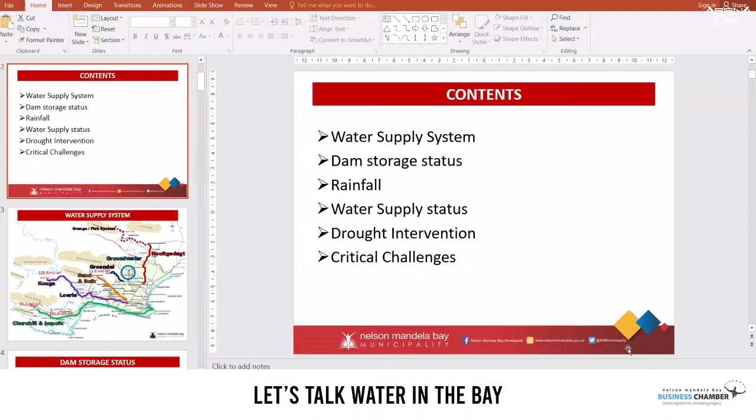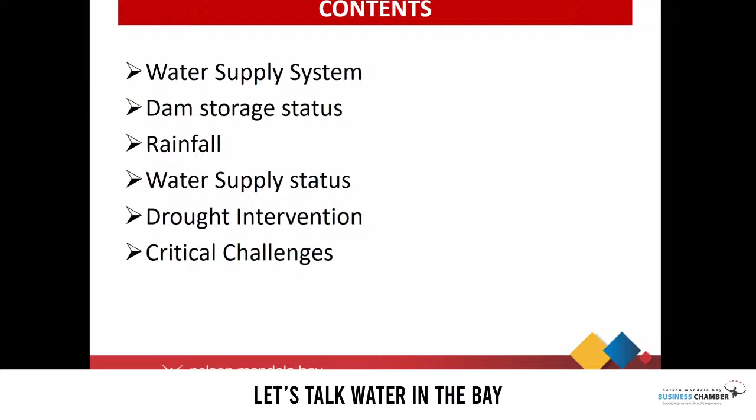I'm Barry Martin, responsible for water and sanitation in the Metro. And this is a status quo of where we're finding ourselves as a Metro in the water. Those are the six topics that I'll discuss briefly. Just to give an indication of where our water comes from, the routes it's coming from.

From the municipality's point of view, there are two main supplies of water: Churchill and Impofu, and the Nooitgedagt. And then we get water and allocation from the Kouga-Loerie system. The Sand and Bulk River is an old 100-year system that's running, and there's a dedicated supply from the Groendal Dam to Uitenhage and some groundwater from springs. And those are the volumes of the dams at those locations that I refer to. I didn't indicate the dams of the Bulk and Sand because they are quite small in comparison.

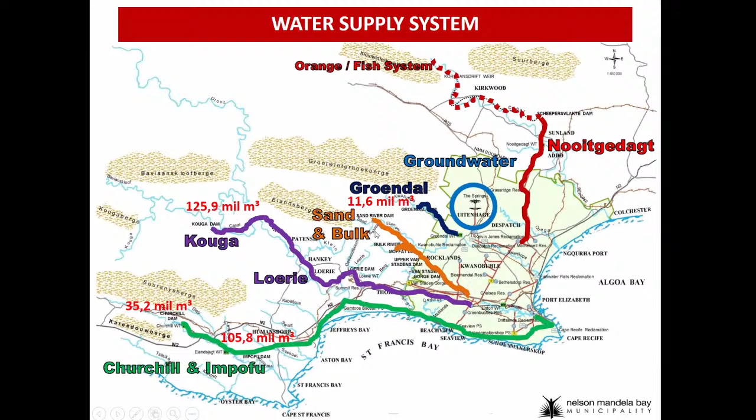Just to bring you up to speed on what the water situation is currently. Last week Wednesday it was about 18.4%. The average dam levels yesterday were 21.62%. And you can see that the Kouga has climbed above the 8% mark where it was. The Churchill was at 52% and it's climbed up by virtually 10%. Impofu was sitting at 18% and Groendal was sitting at about 25%. So there's been some inflow from the two weekends of rain that we actually had. What is the significance of that?

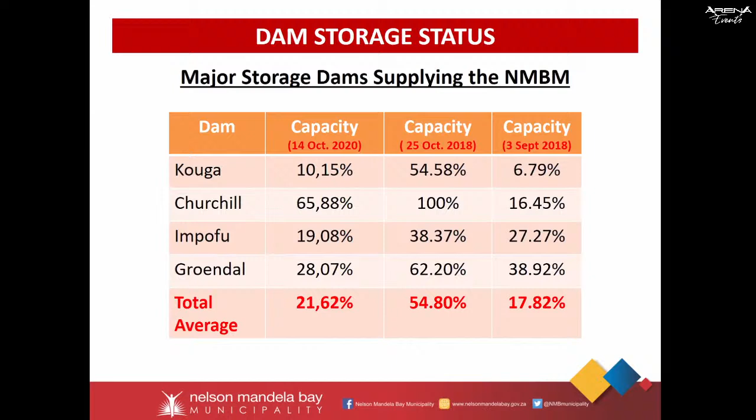Last year, in October 2018, when we had those good rains, the dams went up to 54%. And I just want to show you that two years ago, it was rain of above 200 millimeters in one rainfall event that caused the dams to climb so rapidly. There was a small rainfall event in November last year. This is the 20-year average at the Churchill Dam, and this is just an enlargement of that same period. The hollow bars are the 20-year average rainfall, and the solid ones are the actual rainfall that has happened.

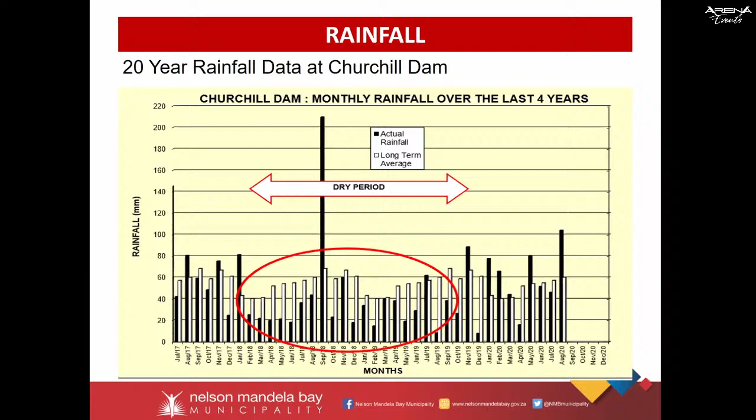So if you look at the period from July 2017 to August 2020, there have been 3, 6, 7, 8 times that it's been above the 20-year average rainfall. The most significant ones above the 20-year average were September 2018, one last year, and one that happened now recently. And we have to add the most recent one up here. So it just shows you that we have had below average rainfall over the last couple of years, and that is one of the big factors why our dams are so low.

Looking at the weather forecast here, this is what we get from the South African Weather Services to indicate the average weather prediction going forward. And you'll notice here, where there's no coloring, that is where our dams are located. And what does that say? There's no clear signal of the kind of rainfall that we can expect here. So we can have no rainfall or a lot of rainfall.

For the last two weekends, we've been lucky to have some rainfall, but there's no significant rainfall predicted in the next couple of weeks. So we are rather erring on the cautious side to say we will at best have average rainfall for this period. And the rainfall statistics that I've just shown you indicate we will probably at best have that situation going forward.

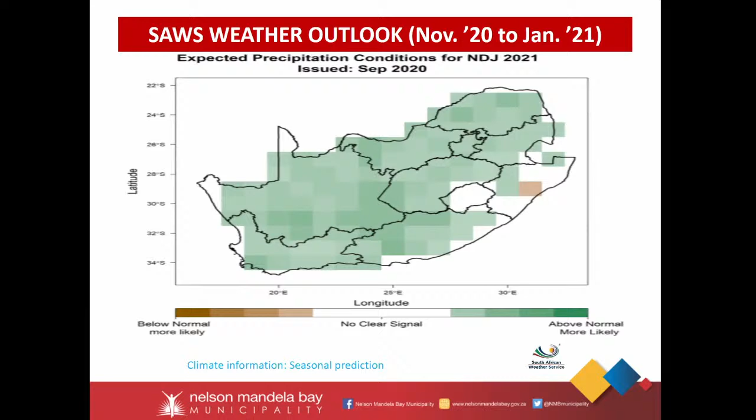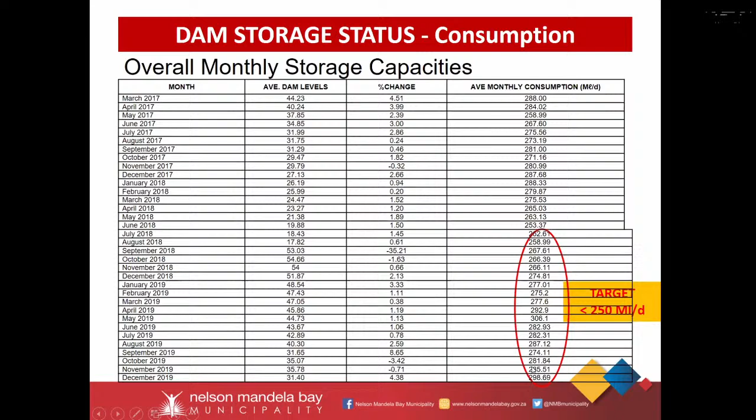Then just looking at our average water consumption since 2017, which we've been tracking, you can see that towards the end of 2019 we were hitting close to 300, and the situation has really not significantly changed. At the moment, we're sitting at about 290 megaliters per day. In the month of September, we averaged roughly 288. We're sitting at 287. And what this means is that we are over-abstracting on the available water, which is 267. That's the restricted volume of water that we have as a metro available from our resources.

Just to put that into context, at the beginning of the water year, which is 1st of July, in June of every year the Department of Water and Sanitation takes stock of the available water in all the resources and checks how much water we can take safely out of that resource for a 12-month period, which is a water year. And based on that, restrictions are imposed. On the Kouga-Loerie system, there's a 70% restriction on the water. That means we're only getting 30% of our water from that resource. On the Impofu-Churchill system, we are restricted to 50% of our water.

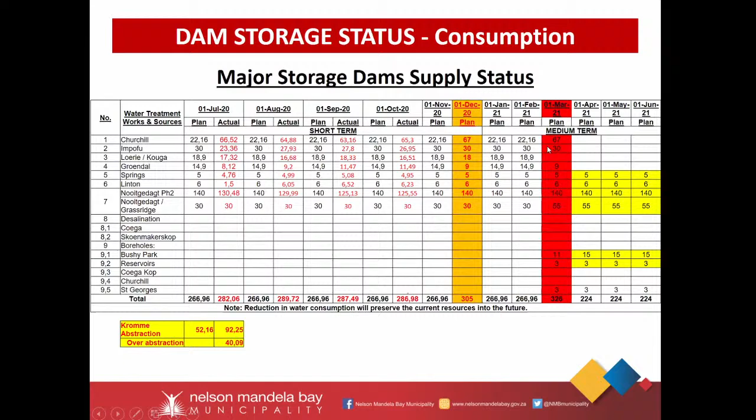So what we're thinking of taking out, 50 megs per day for the 12 months, we can't take that. We're taking more than that 50 megs out of one resource alone. In fact, we're taking about 80, almost 90 megs out of that resource, meaning the available water for a 12-month period is almost cut down by half. And that is the dilemma that we sit with as a metropolitan municipality and its customers.

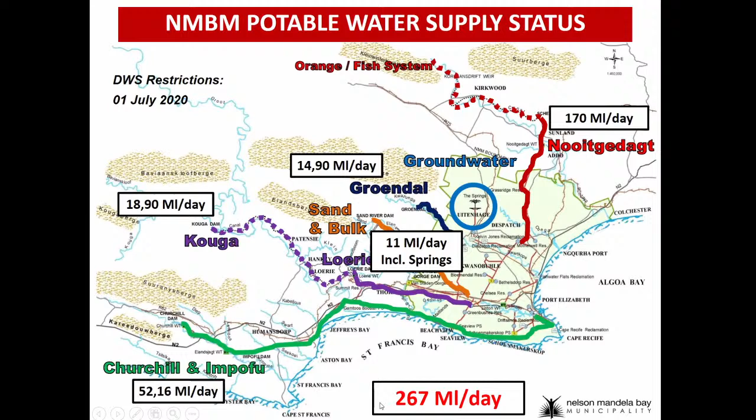So this is just a depiction of the 267 megs per day that I've indicated, 52 from the Churchill and Impofu, 18 megs from the Loerie Dam, which is the balancing dam. We take our water. Remember, that's only 30%. That equates to 30% of available water. Groendal Dam, we only can take about 15 megs per day. Between Springs and the Sand and Bulk, we take an amount of 11 megs per day, and 170 megs we're bringing in from Nooitgedagt to make up the 267. So this is part of the status quo that we're looking at.

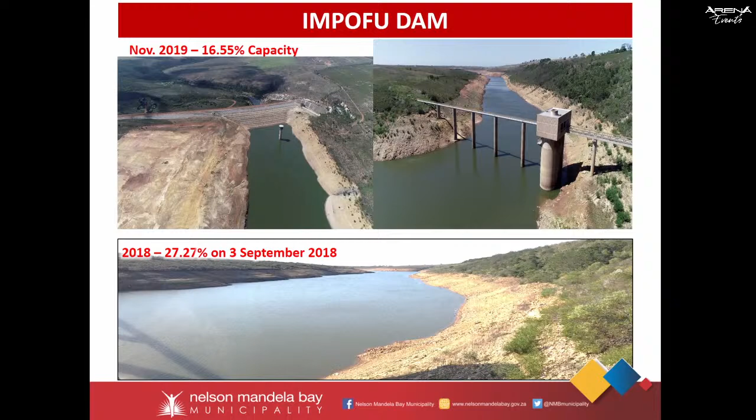These pictures this morning look similar to those in the newspaper, and it just shows you we're going back to September 2018, so we're actually back to that situation again, 24 months later. And looking at the individual water supply, we had these graphs updated yesterday, and it just shows you the impact down here. The graph has been flattened since June. We've been speaking about flattening of the curve. So this is what happened in June. What this means is we're just about taking the average rainfall that is coming in, and this is what's used out of the Kouga Dam.

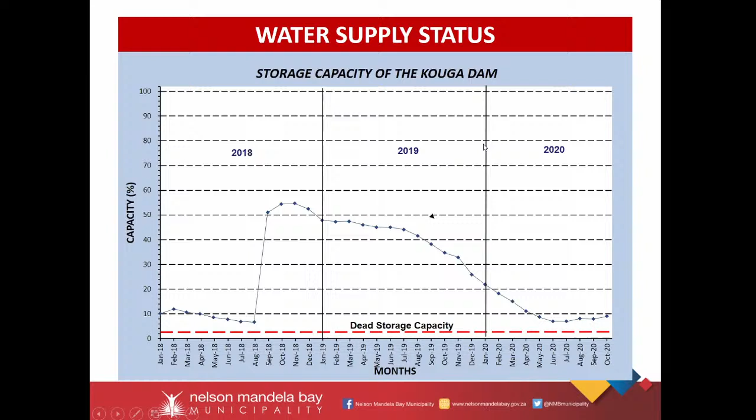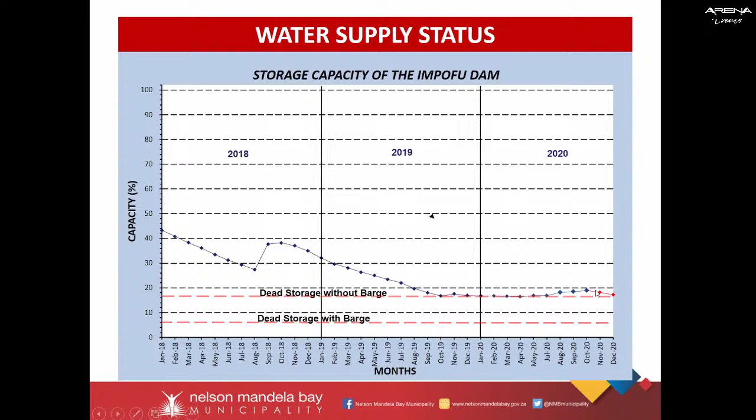The Impofu Dam, even with the rains that we had in August 2 years ago, the dam just climbed from 28% to about 38%, and since then it has been dropping all the time, and it's been flattened at the level where the barge is operating at the moment. And going forward, we anticipate a decline in the dam levels, because we're going beyond the spring rain period into the hot months of summer, December, January, February, where we have our hottest months and obviously months of highest water consumption as well. So we are going to look into a very difficult period going forward, even though we did have some rain and inflow into our dams.

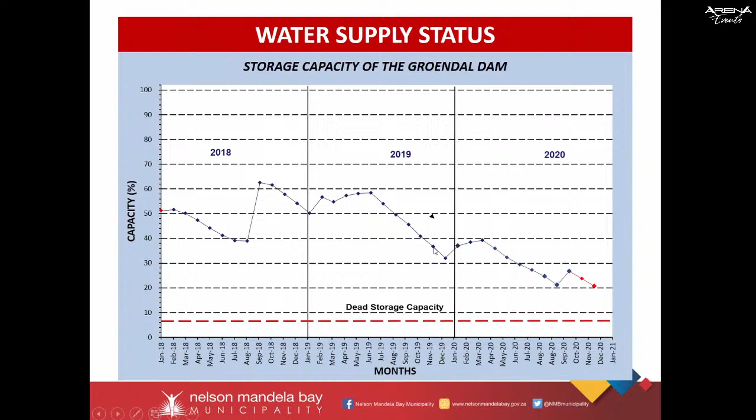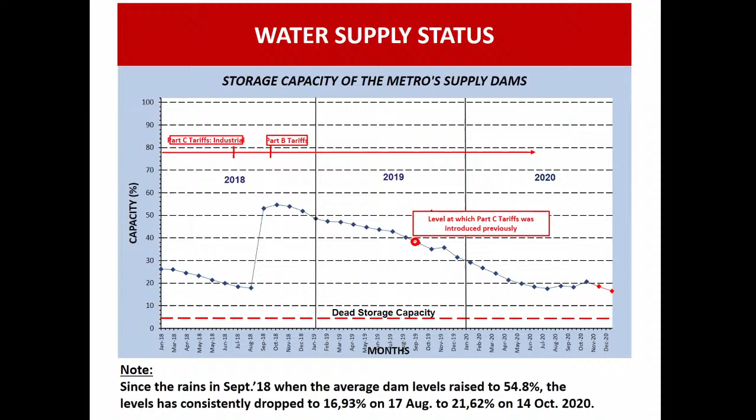That was dated yesterday. So that just depicts the fluctuation in the, shall I say, low rainfall that we've had and the water consumption associated with that during the same period. So what is the municipality doing about it? We have embarked on looking at the backlog of our water leaks, taken stock of it, because that is our first port of call. So we have looked at that already, and we're looking at the water consumption trends that we have had. So we believe by doing this, we've intervened and dropped our water consumption about 5 megs per day. And these are the options that I'm just going to discuss briefly going forward.

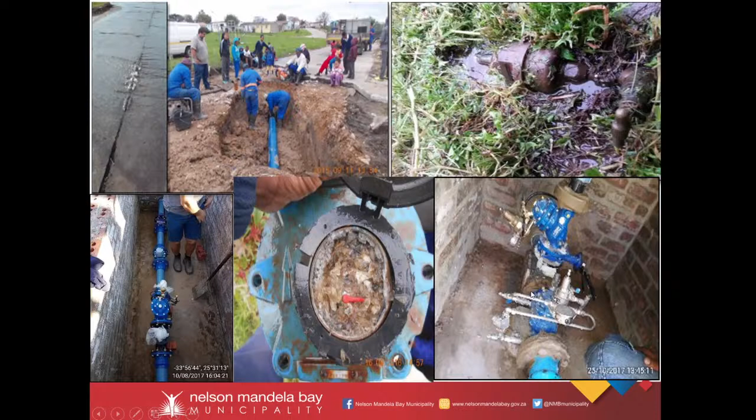As I've indicated on the water leaks, the guys are looking at water leaks. We even look at pressure management per se and advanced pressure management. We've got 60-70% installations of this in the Metro as well, and this is what we are doing on an ongoing basis. We've identified an additional 10 stations that we will be rolling out over the next 2-3 months as well to deal with this matter.

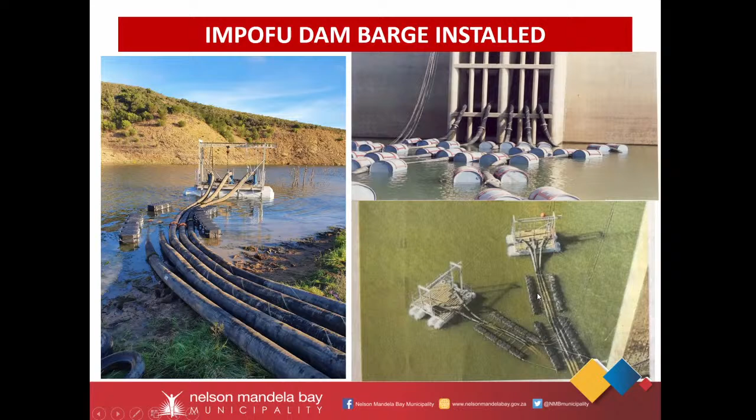Then we spoke about installation of the barge. The barge has been installed on the Impofu Dam. We deliberately did not abstract water from the barge until it became necessary, because it would be more prudent to save the water in the dam and rather use more water from the Nooitgedagt scheme. So that is what we've done there. But over the last couple of months, we've been running the barge full bore, and we're extracting about 30 megs per day from that resource at the moment.

So by doing that, we're actually reducing the demand on the Groendal Dam, because the Groendal Dam does not have an alternative water source backup. So we're cutting the zone smaller to take less water from the Groendal Dam, and therefore also increasing the usage of the water from Nooitgedagt.

The remaining water that's not being used in this area, we pump through 2 booster pump stations, one at Motherwell and the other one at Stanford Road, through to the Greenbushes area into the Chelsea Reservoir area, and from there we distribute it into the western areas, and it feeds into Gelvandale, and from there down into the Lorraine, Fairview areas as well, bringing the remainder of that water to supplement the reduced water we get from Loerie, because we can only get 18 megs per day from there. So the remainder of the water we must take from there.

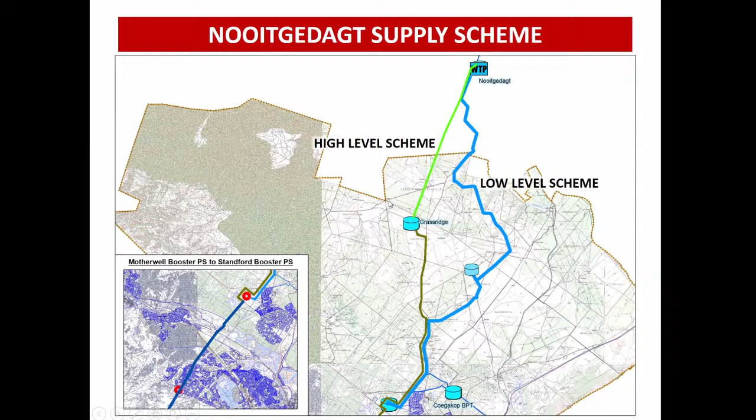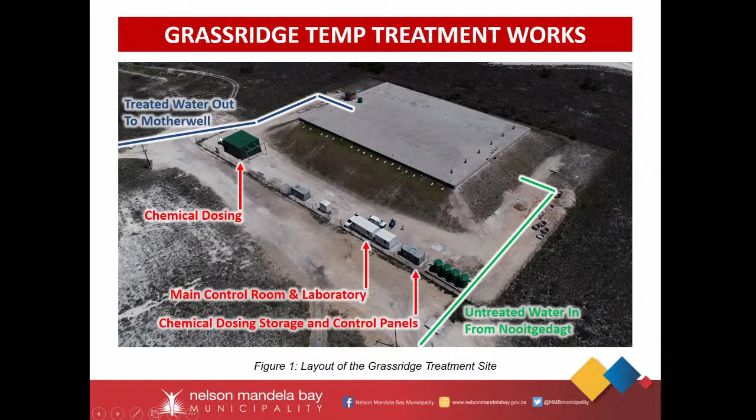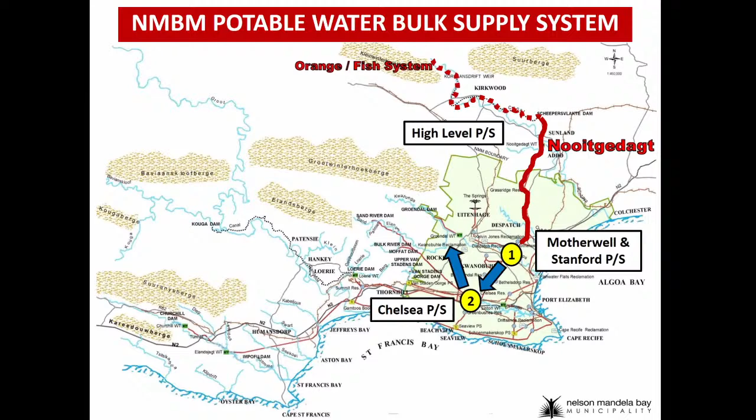And so that just shows how we bring the water in from the high level pump station into Grassridge. After treatment, it goes into Motherwell Reservoir and the Motherwell Booster pump stations, and from there it goes further to the Stanford Road Booster through to Chelsea, as I've explained earlier on.

And then from the boreholes initiative that we have, we've got the Coega Kop boreholes that we've drilled. We've located them on the fault that is linked to the springs, what we call the Coega fault. And we've drilled quite a number of boreholes there. We found 5 production boreholes that can yield significant water. The amount of water that we found is between 15 and 20 megs per day.

And we're constructing the water treatment works at the moment, because the water is high in iron and manganese. It will make your clothes red-brown when you wash your clothes in that. And that's the reason for the treatment facility there.

At the Churchill Dam, we've also located some boreholes there, and the boreholes have been drilled already. We need to put the pumps and motors onto them now, and the pipelines to link them to the treatment facility at Churchill. The same with the Moregrove.

Oh, there he is. Do I continue? Okay. Then at Bushy Park, apart from... are we online? I've explained.

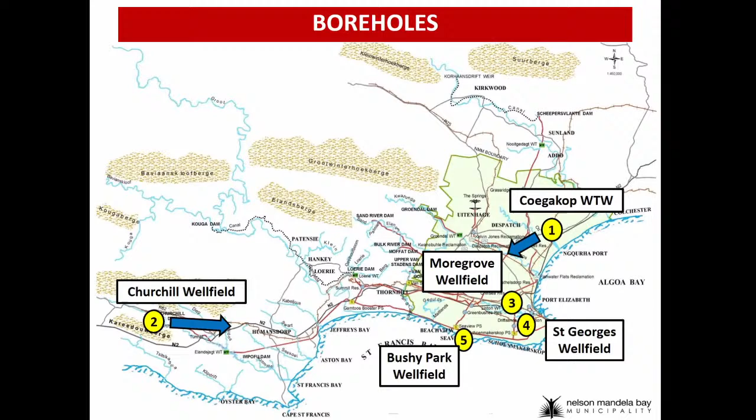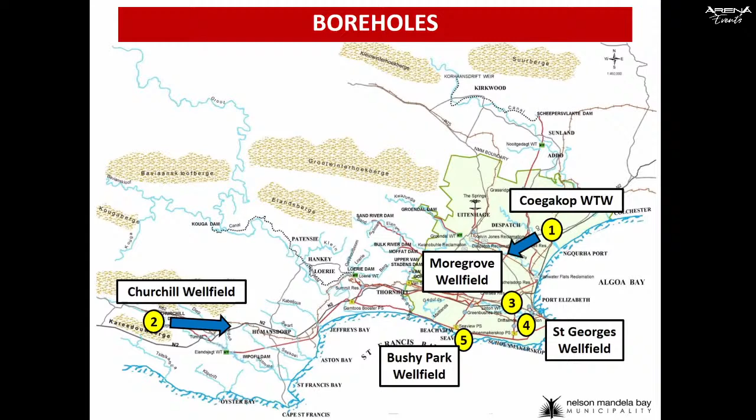So we're getting down to the Bushy Park Wellfield. In this area, we have discovered a good resource of groundwater, which we want to develop. Of all of these, the most productive one is Bushy Park, and that is our main target area, supported by St. George's, and then Churchill and Moregrove. All of these together, we hope to get about 15 to 20 megs per day. And if everything comes on stream later this year, say early next year, we hope that'll be 5% of our demand that we'll be able to augment and offset from this resource.

Communication is obviously very relevant. You've seen on our social media platforms as well as the local newspapers the awareness campaign we're going through, and we appeal to our customers to save water at all costs, to stick to 50 liters per person per day.

And as the CEO of the chamber has indicated, 10 years ago the critical water nature was highlighted, and we are fully aware of this, and behavioral change has to come with this as well. We always say South Africa is a water scarce country, but sometimes our actions don't reflect that, and that probably includes us as a municipality as well, because we need to add more urgency to our response to leaks and the like. So that has remained a critical area for us.

So going forward into the medium term, which is probably 6 to 12 months, I indicate 3 to 12 months because the work is happening already. In about June next year, we will be on full capacity for the Nooitgedagt low-level scheme at 210 megs per day. So that will bring additional water available to us as well.

Then following that, in about March this year, they commence construction of the Coega water treatment works, and that's a 26-month construction period, and that'll come on stream in about 2 years from now and generate 15 megs per day.

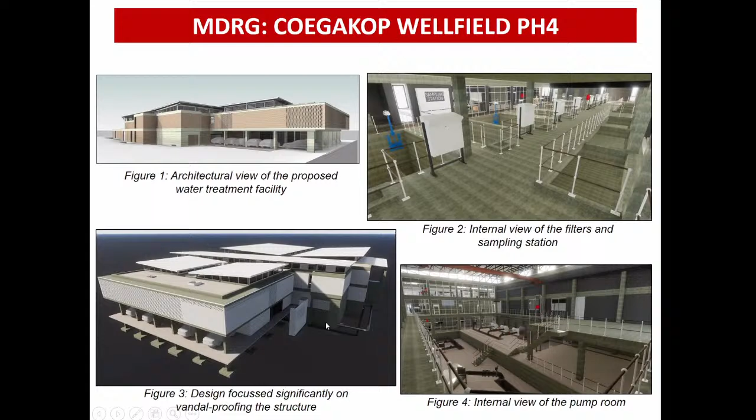This is the latest technology in viewing and providing schematics of how the facility will look, with a lot of natural light, process control, seeing what is going on. So it's been very designed around people operating it and on the smallest footprint possible.

Then just to summarize in terms of medium to long term, because as much as we're looking at the short term to deal with things, we must also look at the long term. And as indicated earlier on, we must look at this as well so that we can look at our water sustainability into the future. So the boreholes will bring us 15 megs per day by February, March next year. The Nooit Gedacht phase will bring us an additional 40 megs per day by June, July next year.

And then the Coega desal plant will probably be by December 2021 or early 2022. That will be up and running then. And then the Coegakop water treatment facility will give us 15 megs per day by September 22. By September 22, we would have augmented the water system with 85 megs per day. And this excludes an additional desal plant for the metro on the Schoenmakerskop side of the metro. So these are our medium to long-term plans, coupled to what we're doing in the interim, which will put the metro in good standing. But the key is to cut the water consumption down currently to achieve that.

So our critical challenges: obviously, we've had a prolonged rainfall period of fluctuation, and we had a 3-year low rainfall period from roughly 2008-9 right up to July 2011, when we had a recovery of the dams. And then since about 2015, 2016, we had a bit of fluctuation, and that's the prolonged period of low rainfall that we've had. The Kouga and Impofu dams, the biggest dams, haven't been full for the last 3 years. So that just indicates the prolonged period of low rainfall that we've had. We still have a problem with high water consumption, and obviously we need to cut water consumption at all costs, at all levels.

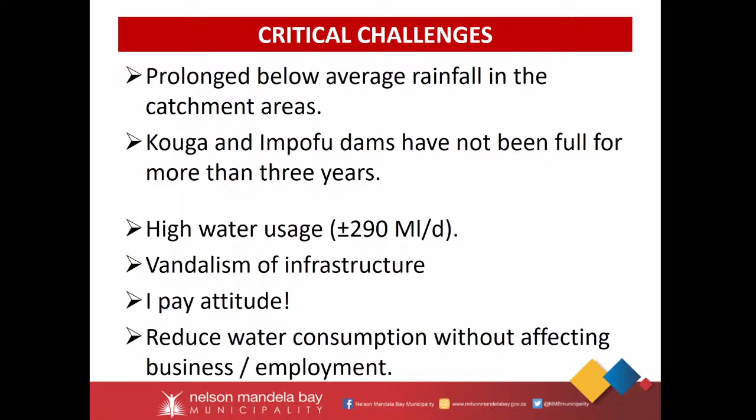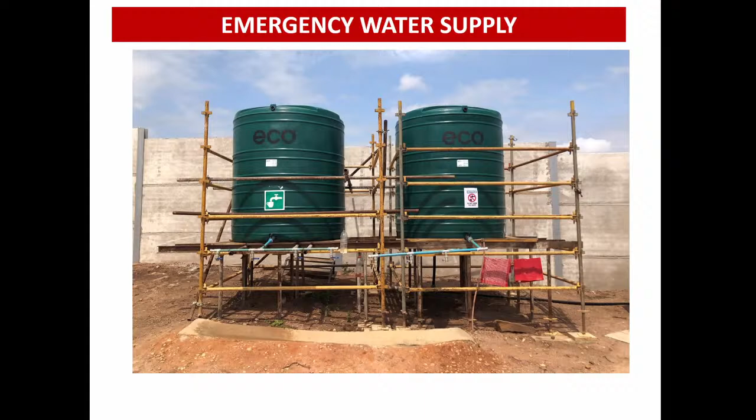We have to reduce the water consumption without affecting business, and this is what we've been liaising with the Business Chamber on over the last couple of years. Because of the frequency of drought situations in the metropolitan space, we've had a lot of discussion with the Business Chamber over the years, and businesses have become water-wise, and therefore we wouldn't want to affect their business, because that affects employment and the like. So that remains a challenge to us. How do we encourage businesses to use as little water as possible, but also keep their businesses running and keep employment at appropriate levels, if not higher? And especially from a domestic water point of view, if we don't do the right thing, this is where we could land up queuing for water going forward.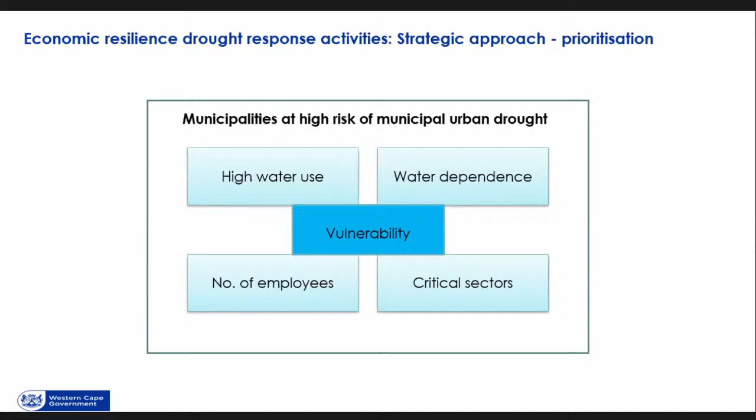This was critical for us because we have certain smaller municipalities where one employer might employ 2/3 of the people who have employment in that area. And we also looked at critical sectors. So if there was a day zero, which were the businesses or types of businesses that couldn't afford to stop operating or to radically downscale their operating.

Across the 4 areas that I spoke about, just some key things that we did learn is that in terms of water consumption, there were significant reductions that were found across multiple sectors. So sometimes these reductions were forced by very heavy restrictions placed onto business. We found the one challenge was sometimes it was seen as the easier lever to pull to reduce water use in businesses by huge amounts because it was easier for government to control. But that has a massive economic impact.

But what we did find with businesses was they did on their own bat manage to find significant water savings. A lot of those savings they could actually achieve with minimal costs. And so a lot of that was through improved metering, sub-metering, behavior change, and process changes. Significant savings. What we also found out from businesses was the more they managed to reduce water costs, they actually subsequently landed up saving energy costs as well, because they were essentially improving their process operations.

Those interventions that businesses put in place around costly technologies actually landed up having very short payback times, particularly as the cost of water rose. There were extensive water cascading opportunities, so within and between businesses. So that's using the partially treated water or partly used water with another business that doesn't need potable water for certain processes. And there was also increased water treatment for reuse on site that a lot of businesses put into place.

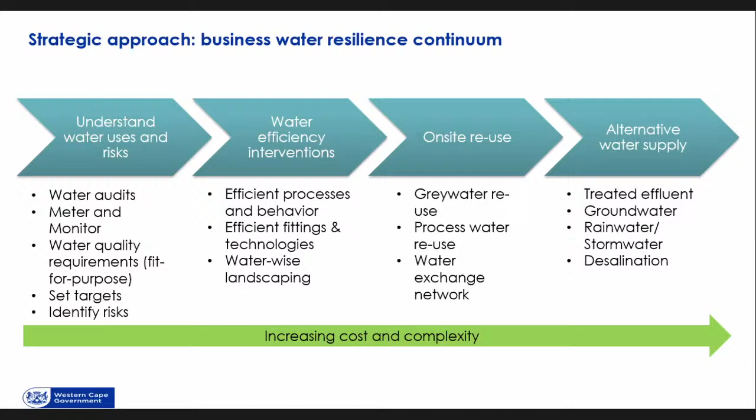The third part of the continuum was looking at potential on-site reuse, grey water reuse, as well as process water reuse, and also looking at water exchange networks with other businesses, particularly in an industrial area. And then on the right-hand side is the alternative water supplies. So whether that be treated effluent, groundwater supplies, rainwater tanks with treatment, desalination, etc. And obviously, as you move from the left to the right of the continuum, you increase the cost and complexity of what's being put in place.

Green Cape, who are a partner through this, also pulled together a number of case studies. Those are also available, and they clearly show what a business put in place, what they spent in that initiative, and how much they're saving both water-wise and cost-wise. We had a number of communication tools, and as I said, those websites are still live at the moment. And we also provided a number of posters. Those posters obviously need to be applicable depending on the audience. So some of the posters that were developed were very much for the tourism market.

The province got hard hit by tourists not coming, fearful of not having water, but also fearful of creating a further burden on the area. So a lot of posters and communication material went out to say, please do come visit. You're the lifeblood of our economy. We need you, but use water responsibly when you get here. There was also a lot of communication material put out, helping to show people, individuals, how to use 50 liters of water a day.

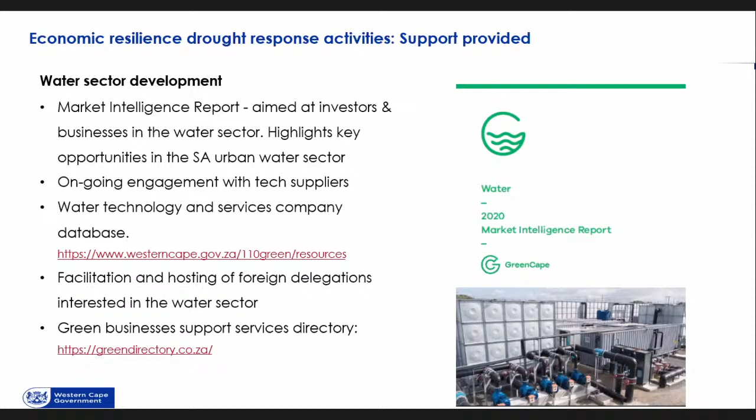And then importantly, Green Cape, with the funding of the Friedrich Naumann Foundation, have just released a Green Business Support Services Directory. So this is for any businesses in the sector that need to know what support is available and where. So further in terms of case studies, just touching on a few things, is JG Afrika, for example. So this is an office commercial environment. They managed to reduce their water consumption by 67% purely through awareness and water efficiency measures. This is a company that was fairly up to speed with issues around resource efficiency even before the crisis. So it shows what is possible when you really apply minds.

ACA Threads, so a big manufacturing company, they reduced their water consumption by 70% over 5 years. So they started pre the drought, because we obviously had a drought back in 2010 as well. And that was through equipment automation and process adaptation. They're saving 1.9 million rand annually. Quality Beverage reduced their water use by 27%.

That was largely through a staff water saving campaign and reusing bottle rinsing water. So again, it shows the cumulative savings so far, but also the investment that they put in place, and shows that a relatively small investment can lead to massive savings even from year one.

Transpaco Flexibles, so another manufacturing company, reduced water by 85% through conversion from water to air cooling machinery and recycling process water. And lastly, GSK, the pharmaceutical company, by using 2 reverse osmosis plants, reduced their water consumption by 42% over 6 years.

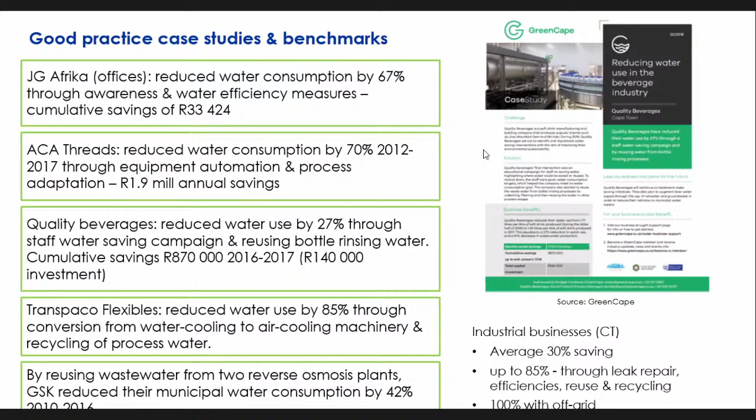So a huge request to yourselves is, when you engage with businesses, is to really stress that in the city of Cape Town, for example, commercial water use is higher than industrial water use. So the commercial guys should have reduced a lot more, but didn't. So really encourage all to play their part. So some of the key lessons learned.

The first is that water regulation is confusing. So a lot of businesses don't know where to start. They may receive incorrect information from consultants. Really encourage you to tap into the resources that you've got, but also to work with the chamber and with the local government associations and others to really demystify regulations and to help you through those processes.

The transparent and frequent communication was absolutely critical to what we managed to achieve. We built partnership models, we built trust, and you need to do that so to avoid a blame game and really find where your common ground is and where you can work together.

We need to find effective ways of channeling private sector support. So a lot of businesses really wanted to support the bigger effort in terms of water saving. Here, one of the most successful campaigns, I think, was one started by ShopRite, which is a smart water meter challenge in schools.

The government decision-making processes are incredibly complex. And there was a lot of criticism over government as to not being transparent, making the information too complicated, contradicting itself. Where we saw a turnaround in that space was where the city started producing what was called a water outlook. It was a very clear document. It was a 4-page document.

It came out once a month, and it gave a really clear indication as to where the dam levels were, where demand was, where supply was, what the key challenges were that the city was working on. A very useful document. So I'd really encourage the authorities within Nelson Mandela Bay to potentially look at something similar.

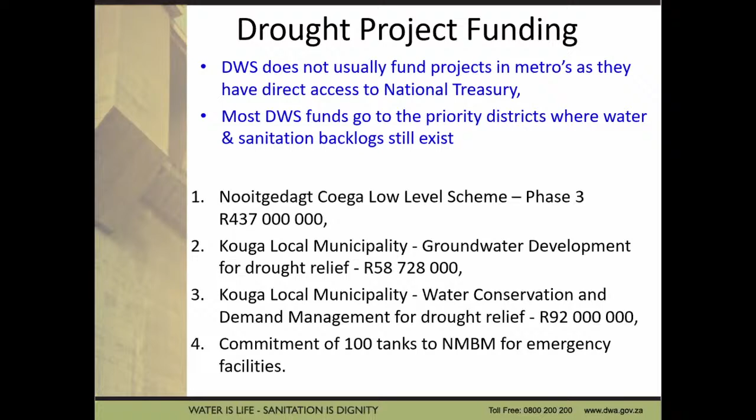But I wanted to talk about a number of projects where we are involved. The Nooitgedagt Coega low-level scheme that Barry Martin referred to, we are funding phase 3 of that project. In the Kouga local municipality, we are funding groundwater development to find alternative sources and relieve some of the pressures on the Algoa system, and also water conservation and demand management. And lastly, at a recent meeting, we gave a commitment for 100 tanks to Nelson Mandela for the emergency facilities that Barry was referring to.

The Nooitgedagt Coega low-level scheme phase 3 is the construction of a 70 megaliter treatment module, bringing the capacity up to 210 megaliters a day, to be completed in July. It also includes the construction of a 45 megaliter balancing storage reservoir at Olifantskop, the one in the photograph, which is practically completed. And then cathodic protection, AC mitigation and pipe rehabilitation on the bulk infrastructure.

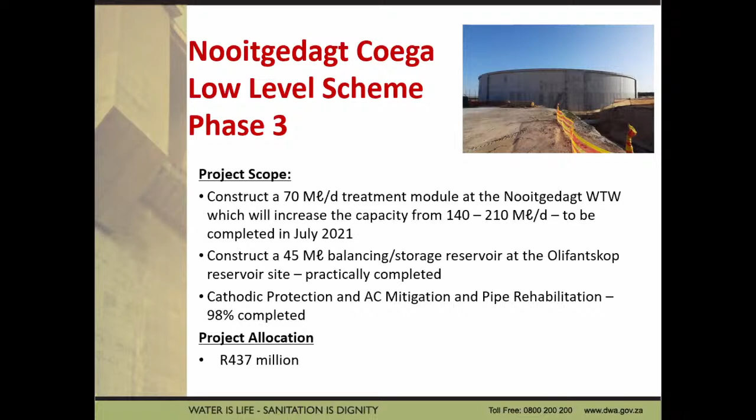And the project funding in phase 3 is 437 million. The other projects in Kouga local municipality, as it's not directly in Nelson Mandela area, I'm not going to spend much time on it, but the scope is groundwater development at Oyster Bay, St. Francis Bay, Jeffreys Bay, Humansdorp, Patensie and Hankey. And that's to ensure that there is alternative sources available, both for meeting the drought needs, but also for future development in the areas. The total yield of the boreholes drilled has been 10 megaliters a day, of which 6 megaliters is already equipped and connected to water supply systems.

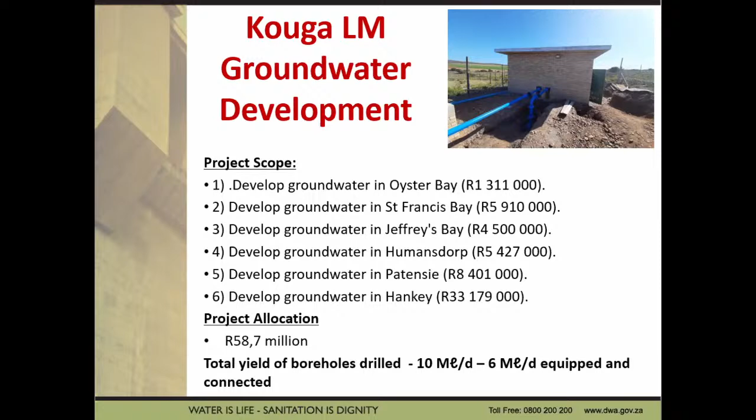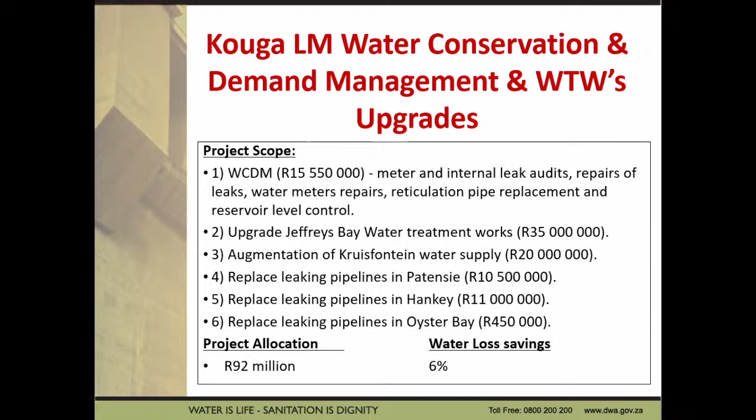The other aspect in Kouga municipality is working on water conservation and demand management and upgrading of water treatment works so they can function effectively. And the water conservation and demand management is looking at installing meters and addressing internal leaks and repairs of leaks and so forth. The upgrading of water treatment works at Jeffreys Bay, augmentation at Kruisfontein, the replacing of leaking pipelines in Patensie, Hankey and Oyster Bay. I'm not going to go into the detail because it's actually beyond Nelson Mandela's boundaries.

I'm going to move briefly on to the planning support that is provided to the city and to the Algoa systems. And the first one is the Algoa Systems Reconciliation Strategy Study. These are studies that are conducted every few years to ensure that they remain abreast with changes, and they are the ones that guide the development within the Algoa system. And then secondly, the Water Resource Planning Systems Directorate that looks continually at the various systems and at the Algoa system and looks at drought circumstances.

Just to give you some detail about the Algoa System Reconciliation Strategy, it's funded by the department and its objective is to assist the users, which are Nelson Mandela Metro, the agricultural sector and the Kouga municipality in determining short, medium and long-term water resource options. And it's through the study that the various drought interventions that we're seeing now, the Nooitgedacht low-level scheme, the groundwater developments, and future supply options are considered.

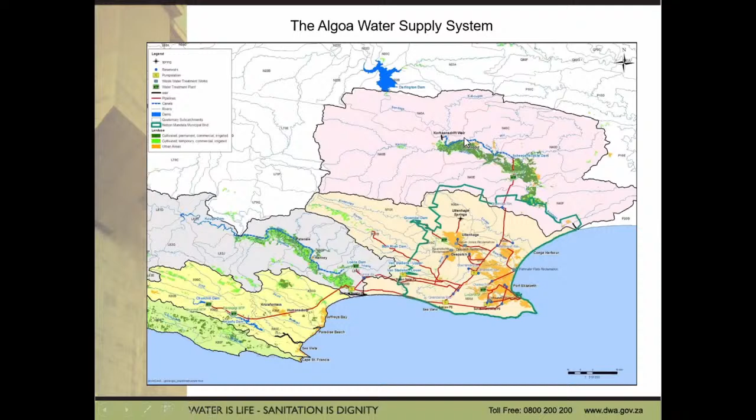This is another version of the slide that Barry Martin showed, and it shows the Nelson Mandela Metro. And obviously the metro boundary is quite limited, but many of the resources are outside the boundary. We see the Kromme system, the Kouga system dam at this point, and the Nooitgedacht system that we can see here. What I'm showing too is the agricultural sector that participates in using the same water, both in the Lower Sundays River and along the Gamtoos Valley over here. And some of the water has to come quite long distances. So I'm going to just indicate where the Nooitgedacht water does actually come from in the next slide.

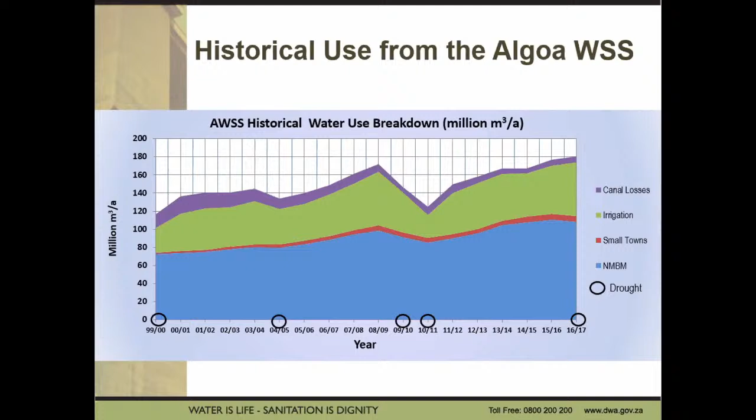We also then look at the interventions necessary to make sure there is sufficient water going forward. And these bullets refer to the interventions that were considered. And the first one was water conservation and demand management. We can't afford to lose valuable water, especially water that is being treated to drinking water standards. And we need to have water conservation and demand management introduced at levels of 5%, 10%, and 15% savings. Then the second bullet was the Nooitgedacht scheme. Phase 1, 2, and 3 were developed, and we're currently finishing phase 3.

And phase 4 will be the next phase that needs to be considered going forward. Effluent treatment for, first of all, industrial use and even later potable standards was to be considered for Fishwater Flats and Coega areas, and the reuse was to be brought in phases. And some of it is happening, but not at a large scale at this stage.

Then various groundwater schemes were considered, and we see them being developed already. And then the Lower Sundays River, where the return flows from the agricultural uses down that system could be considered, but we would have to have a desalination because the return flows are fairly salty. And then straight desalination of seawater.

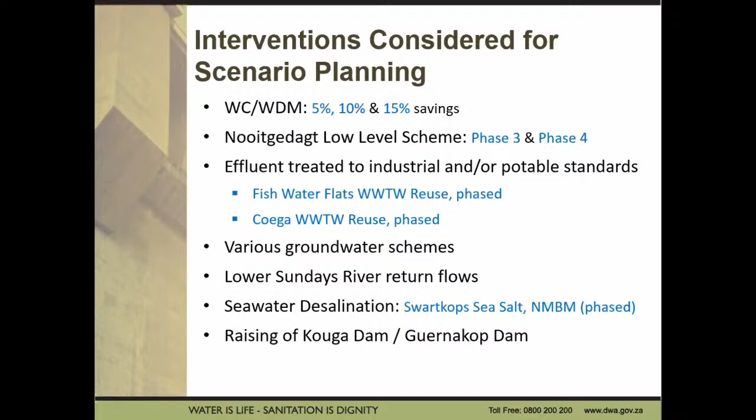The proposal there of Swartkops sea salt has been overtaken by the Coega IDZ one, and then the Schoenmakers that Barry Martin spoke about. And then lastly, development of further surface water was to look at raising of Kouga Dam and also the Guernakop Dam, which is inland of Kouga on the same river system.

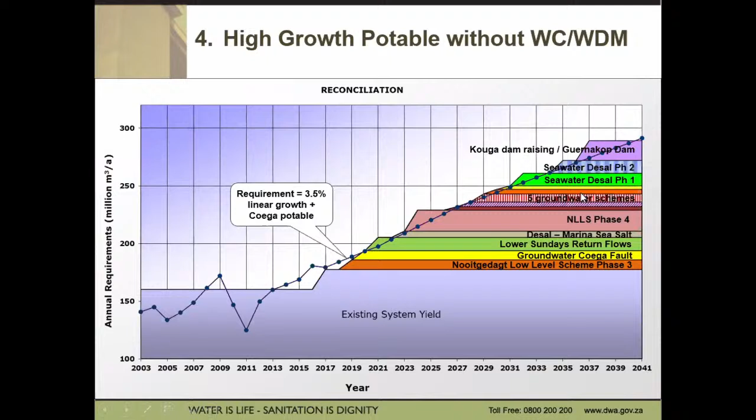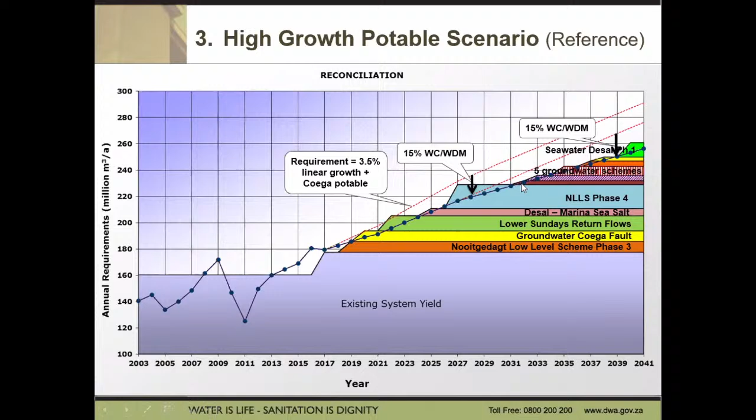The next slide shows the opportunity that can come in with water conservation and demand management, and this line can be reduced by saving the losses and minimizing the demand on our systems. Just the scenario conclusions is that our shortages are often caused by drought, and that effective water conservation and demand management and leak control are essential to ensure that our municipalities and our users can have sustained water.

We need to complete the Nooitgedagt low-level scheme, and the issue is planning of interventions must proceed timeously, because we find that we are having a longer implementation lead time required, and we also have uncertainty in growth of a water requirement. And the groundwater schemes to be pursued by Nelson Mandela Metro, and we can see progress that Barry has reported on. And then the desalination schemes were seen more as a long-term initiative. They are not switch on and switch off schemes.

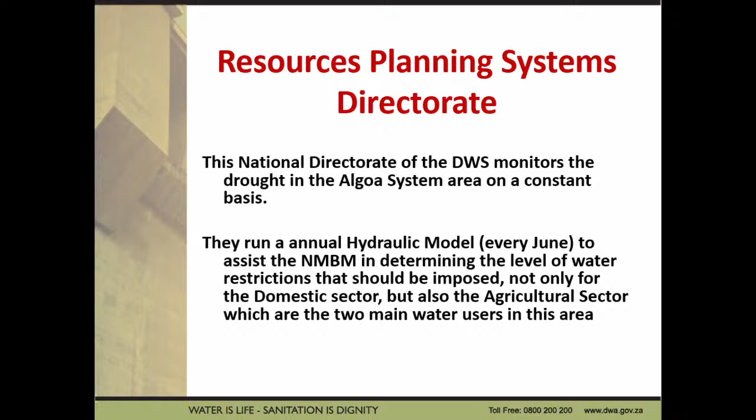I'm moving on to the resource planning system that we look at with the support. And this is a national directorate that monitors our systems, including the Algoa system, on a constant basis. And they run the annual hydraulic models to ensure what level of water restrictions are required each year. Now, if we observe those water restrictions, we will not run out of water. And so that's how the system does help, but we do need discipline in observing the restrictions.

I'm moving on to the drought management support that we are involved in as a department. And I'm going to talk briefly about the Algoa system drought monitoring meeting that meets monthly, the war rooms, and also the department serving on the joint operations centers.

Just briefly, the Algoa water monitoring meeting has been ongoing monthly for a number of years now, because as Barry has said, we've had drought conditions over a protracted period. But we do monitor the water use of all the sectors, as well as the interventions that are put in place, and we meet monthly for those meetings. And then we also try and address any non-compliance issues or stumbling blocks that we do find.

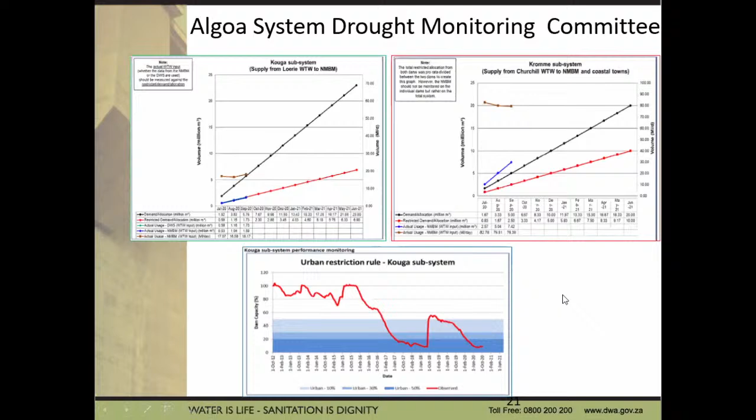And then the bottom graph just shows how we monitor and track water usage and the levels of restrictions that are required on the Algoa system. And this is specifically the Kouga subsystem. But we have these for all of the subsystems and the whole system in the Algoa system.

Lastly, I want to just talk about the war room that is meeting. Our provincial office has established a 2-weekly war room meeting that meets with all the municipalities, where we can discuss the challenges that the municipalities are having. We can monitor the implementation of activities, and we can assist with issues that are raised.

In addition to that, we've got a WhatsApp group that allows very prompt communication and attention to be given to challenges that arise, and then feedback that can be given. And on these forums, the municipalities are also able to report on their project implementation necessary for the drought mitigations. That's basically the presentation I wanted to give.

And really the message is that the municipalities need to comply with the water restrictions that are imposed, and the water users, as the domestic users, industrial users, and agricultural users, do also need to comply with those restrictions. And then we will ensure that we have enough water for all. Thank you very much, Chairperson.

Mr. Lucas, thank you very much for this presentation. It also shows that all spheres of government do have a role to play, and also with the support. But I also like what you said about planning, because planning is key. That's why if we have to have water in the next 20 to 30 years, our planning today has to be very strong.

I do like what you say. You say if we observe water restrictions, we will not run out of water. And I think that's a message that we should all carry forward in terms of how we do, and in terms of the behavior change that we all need to have.

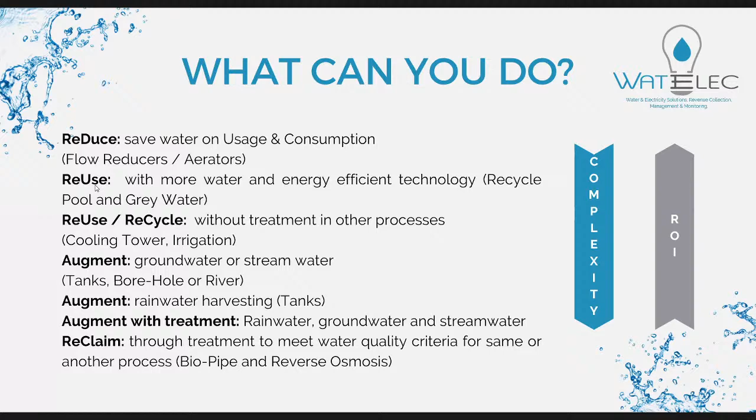And then obviously the reclaim would be where you treat the water to a high quality, which can be then used to drink, which Barry Martin obviously mentioned. And then there's certain solutions with biopipes, naturals, and then there's obviously reverse osmosis, which allows you to then be able to drink the water. So that's generally the processes that can be followed and the options available.

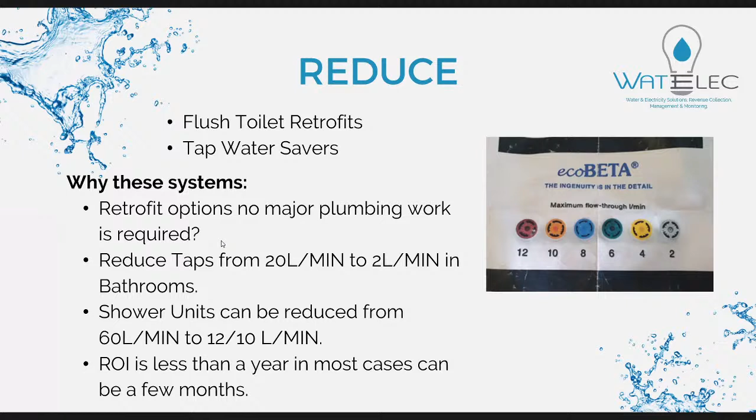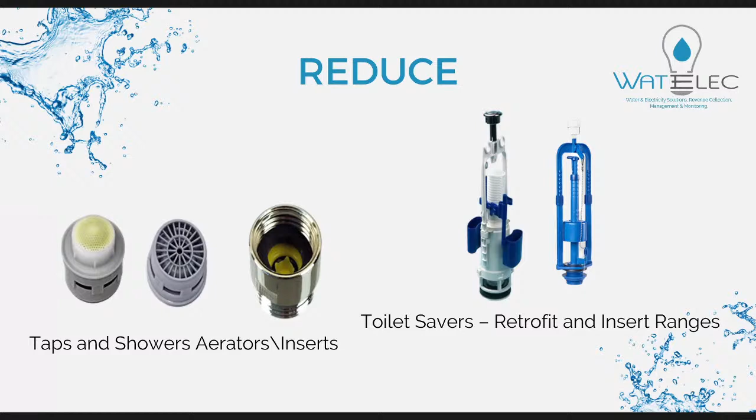You can reduce your showers from 60 or 20 liters a minute to 12 and 10 liters. And the return on investment is less than a year in most cases where you install. There's a picture that shows you the different options, with the toilet savers on the right, and you've got your aerators, and there are types of solutions. Not all taps and all bathrooms have the same tap mechanism. So if you don't have a tap with an aerator on it, you can install it under the counter before the water goes through the tap.

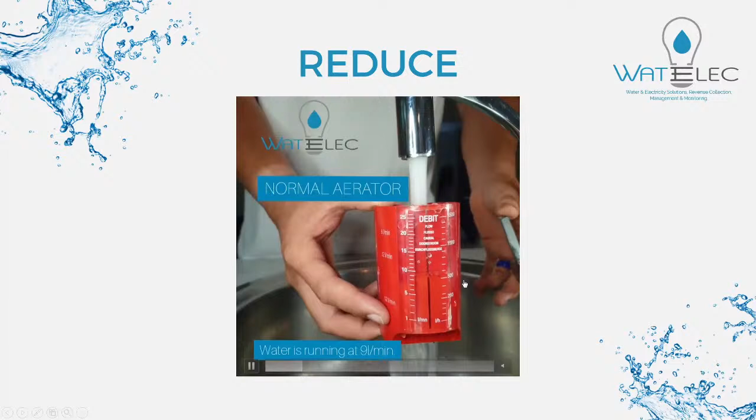This is the video that shows you a normal aerator in a kitchen running at 9 liters a minute. And then we can install different types of aerators where that aerator runs at 1.25 liters a minute on the same tap, therefore reducing the water consumption from 9 liters to 1 liter. So every minute you're saving 8 liters of water without even realizing it. And then you can set it up at 2 liters a minute.

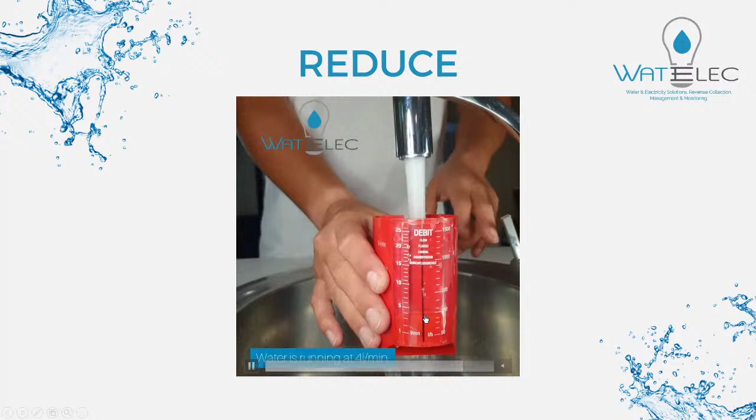So in kitchens, if you want to fill up a basin, you don't put a 1.25 liter aerator in, you can put a 2 liter or a 4 liter a minute aerator. And then these ones are the mist, where you just want to wash your hands, you have a bit of soap, you don't need a lot of water. You can install this mist in all public toilets, bathrooms, those areas, in order to reduce the water. And there's an example of a 4 liter per minute running. So you can install that.

These are some of the solutions that you can install on certain cisterns that are commonly found around the globe. You've got your standard valve, and I'm not going to go into too much detail here, but we do have solutions that allow you to install on cisterns where it reduces the water. So if you're just having a wee, you don't need to use the whole water in the cistern. You only use, say, 50% of it. So that's a way of saving.

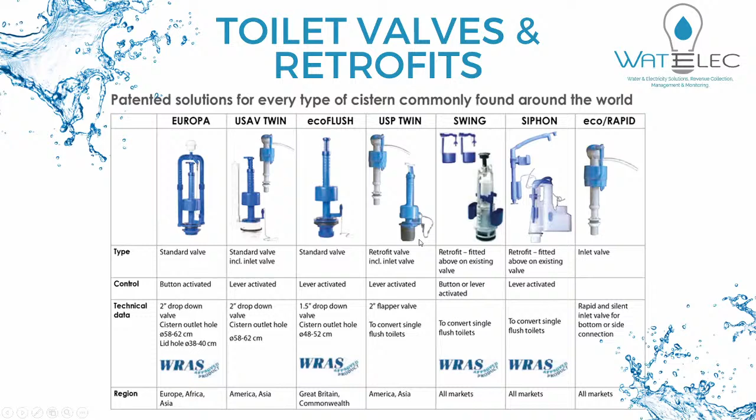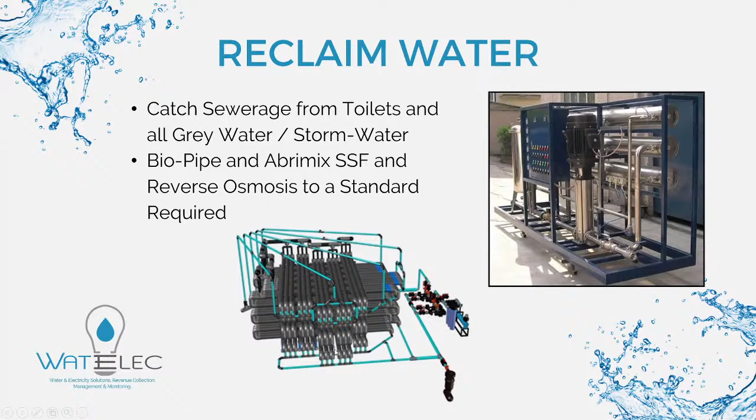The other thing is obviously to use reclaimed water, which Barry and all the guys have alluded to, where you can install these types of systems. This is a biopipe, which uses natural microorganisms to treat the water, and you can oxygenate and put chemicals and treat systems. So this is a standard little system that you can put in that allows you water access.

What we've approached and looked at in the metro is trying to have dedicated independent plumbers to help fix the leaks in pipework that may be logged at the call center, where we have, say, a corporate fund where we can assist the municipality. It was nice to see that a lot of the leaks have been fixed, that Barry mentioned in the numbers. So that's great to see.

And then there is new technology on the market where you can injection mold certain pipes underground, or pipes at your house. If there's pipework in the wall, you don't have to dig open the wall to fix the pipework. There are ways and solutions to fix those leaking pipes underground and so forth. There's also new technology which we're looking at that can pick up movement and vibrations on underground pipework. And this allows you to pick up potential areas where leaks or breaks can happen on pipework.

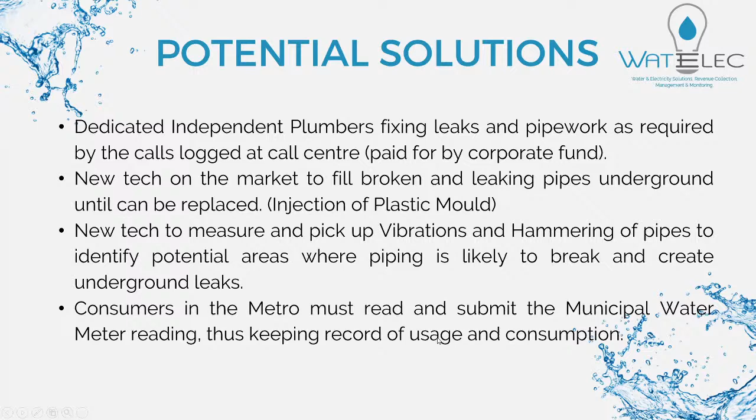And also the important thing: the consumers in the metro can register on the IVR system with the municipality, and they can submit their actual municipal water readings monthly. That's keeping a record for themselves, if they don't feel like they would like to install sub-meters with smart metering. And they can then manage their usage and consumption and keep track of it to take ownership.

The other thing, which Helen mentioned, is smart water metering, where the consumer can install a sub-meter, and the meters can detect leaks and pick up and track usage. So this prevents the wastage of water due to leaks. And then the most important thing is the change of the consumer mindset in the Nelson Mandela Bay Metro, where, as Barry said, if I can pay for it, I'm going to use it. Unfortunately, we can't have that mindset.

We need to solve this water shortage together, and we need to use all role players, and that includes the consumer and the ratepayer as well, in the Metro, and then we need to band together to solve the crisis. And I want to end off on a quote that I found from Alicia Rayner.

Sometimes we don't face what's going on in our world, be it a water crisis or an earth crisis, because it's a little too scary and painful. So just like we don't want to face the parts of ourselves that are a little too uncomfortable or painful, we've got to face both and love both so that we can heal both. So therefore, you know, we need to come together. It is a crisis. You don't want to be queuing for water, so everyone's got to play their part. And even if you just save 2 or 3 liters a day, it adds up in the overall collective.

I just want to share one more screen, just to give you an idea of the sort of savings that can happen on a simple aerator. So if you look here, we've got a bathroom using a 1.25 l aerator, a kitchen and a shower. This is your current aerator that's installed, and every minute you're using 30 liters.

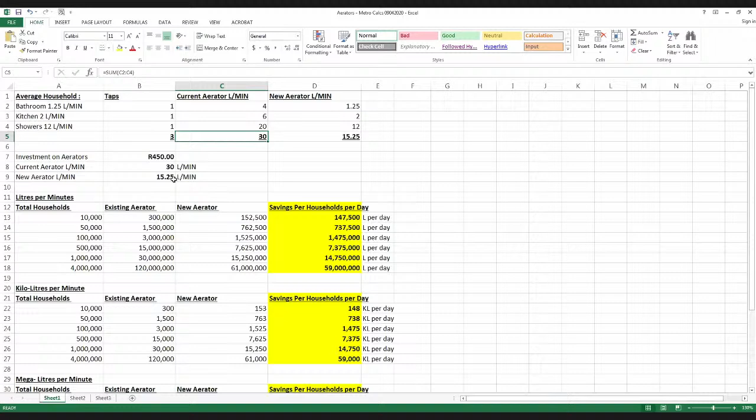Perfect. So what I've done is I've taken a current aerator, say if you've just got one tap in your bathroom, one tap in your kitchen and a shower unit, you've got your current aerator of say 4 liters, 6 and 20. And if we install the new aerators on, you can see the saving from 30 liters a minute down to 15.25 liters a minute. Your investment is roughly 450 Rand in total for those 3 aerators.

And if you take 100,000 households on an existing, so you've got your 3 and your 1.5 liter saving, there's a 1.48 megaliter per day saving. Just putting in the aerators with a minimal investment of 450 Rand. So it is doable immediately.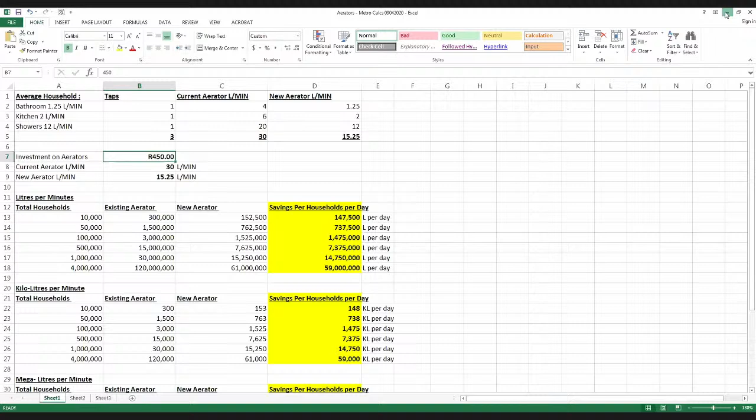I have approached a lot of the corporates in the Metro, where we are asking them to please, if they can, look at financing these aerators for the employees, where we can supply the employees these aerators and install them in their properties for people who financially cannot afford to put them in. That's what we are looking at the moment.